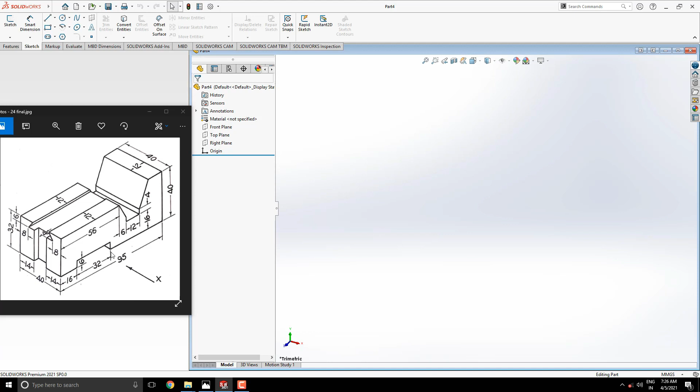First, we analyze the diagram and decide the steps. At the start, we select the right side plane, and start the profile from this corner point. Complete the profile according to dimensions. Then extrude this up to the given dimensions. Next, we make a rectangle and cut out this from solid. Also, make this sketch for cutout. Our model should be completed.

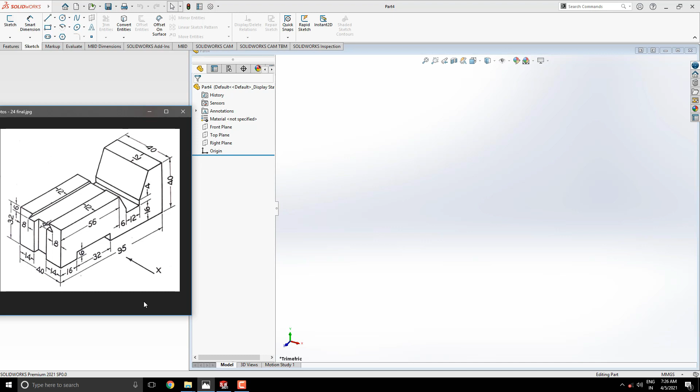Let's start modeling. Select the right plane for the sketch. Start the sketch with the line tool. Start drawing a line from the origin point to the upside, 40 millimeters. Next, draw a 12 millimeters straight line to the left side. Now we need to draw an inclined line. But make sure we do not get tracking references from any snap point, such as midpoint or endpoint. Approximately, I select a point here.

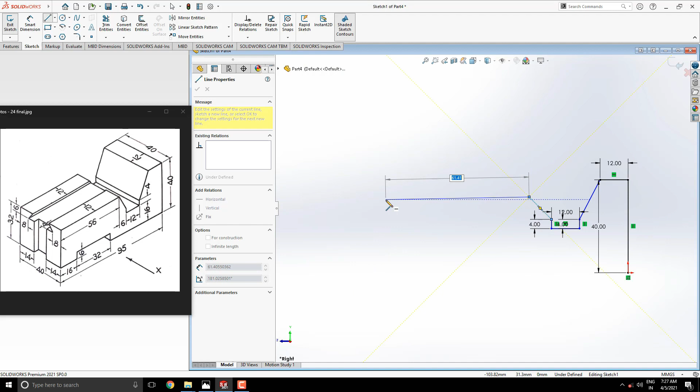Then, draw a 4 mm straight line to the downside. Draw a 12 mm straight line to the left side. Next, draw a 4 mm straight line to the upside. Once again, we draw an inclined line like this. Then, draw a 56 mm straight line to the left side. For the vertical line, get a tracking reference from the start point of the profile. Draw the vertical line like this.

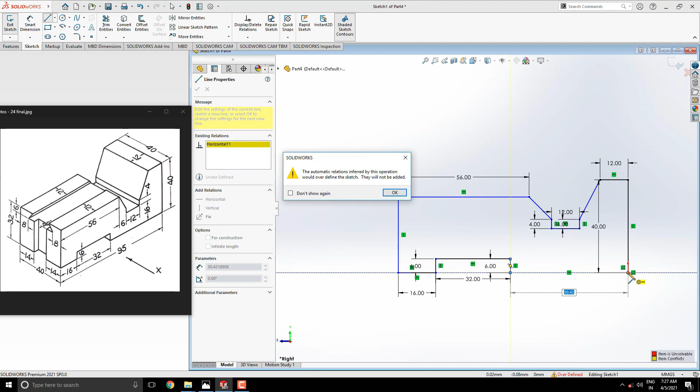Next, draw a 16 mm straight line to the right side. Next, draw a 6 mm straight line to the upside. Then, draw a 32 mm straight line to the right side. Next, draw a 6 mm straight line to the downside. Join the start point of the profile to close the sketch. Here, a notification about an over-defined sketch. Just ignore this. Escape the command.

Now, we are required to fix some dimensions, such as this vertical line. Give this dimension 32 millimeters. Next, give dimension between these two vertical lines, 95 millimeters. Now, set dimension from this vertical to this corner, 6 millimeters.

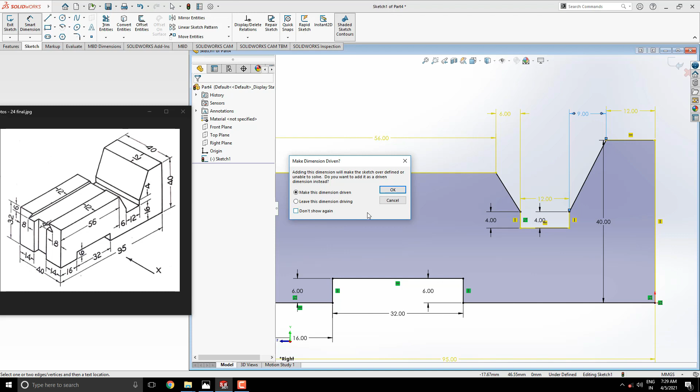Now notice here, this dimension between this vertical line to this corner point is already set. Here we got a notification that we cannot change this dimension value. Just click on OK. Our profile is completed. Make sure we draw the profile according to the dimensions as given in the diagram. Extrude this with the mid-plane option, up to 40 millimeters.

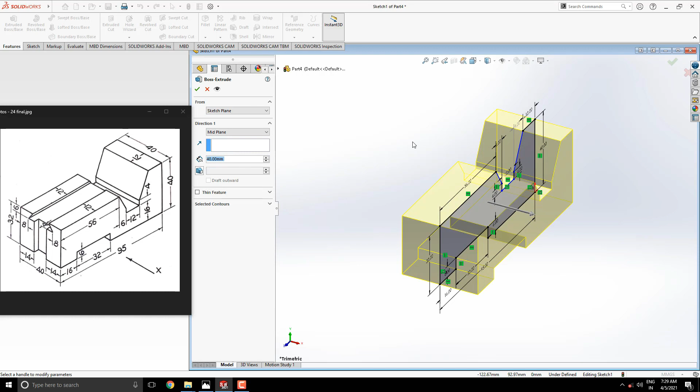Now, we make a profile for this rectangular cutout. Select this face for the sketch. Take the corner rectangle tool and start to draw from this edge in this direction. Enter the 4 mm width of the rectangle. And for the length, we select an approximate point on this edge. Ignore this warning.

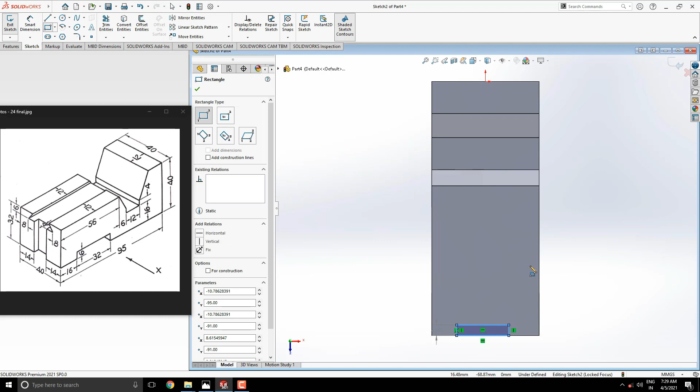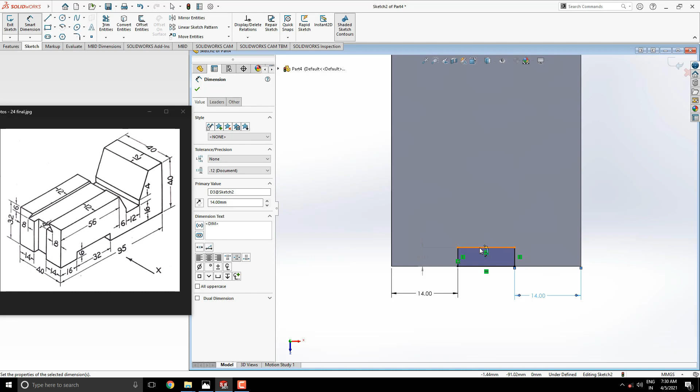Set the dimension between this edge to this vertical line of the rectangle, 14 millimeters. Similarly, this vertical line to this edge, 14 millimeters. Now, see here, the length of the rectangle is set automatically, such as 12 millimeters. We cannot change this value, because we set outer dimensions for this length. Take the extruded cut tool and select the through all option. See the preview and click on OK.

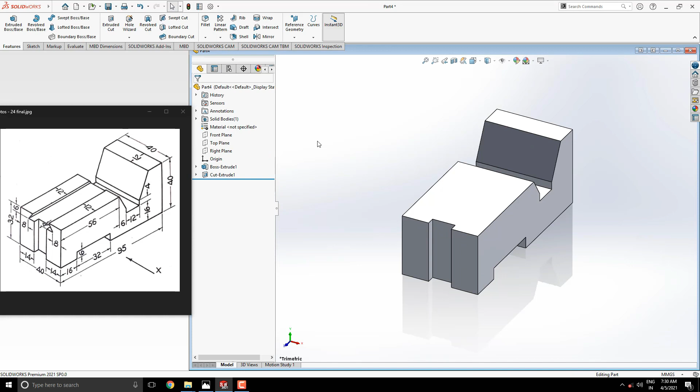Now, we make a profile for the next cutout. Select this face for the sketch. Take the line tool and approximately draw the profile as shown in the diagram. Like this. Make sure to not select any snap point.

Now, set the dimensions as given. Such as, between this corner point to this edge, 8 mm. Similarly, between this corner point to this edge, 8 mm. This corner point to this edge, 12 mm. And, this corner point to this edge, 12 mm. Our profile is set.

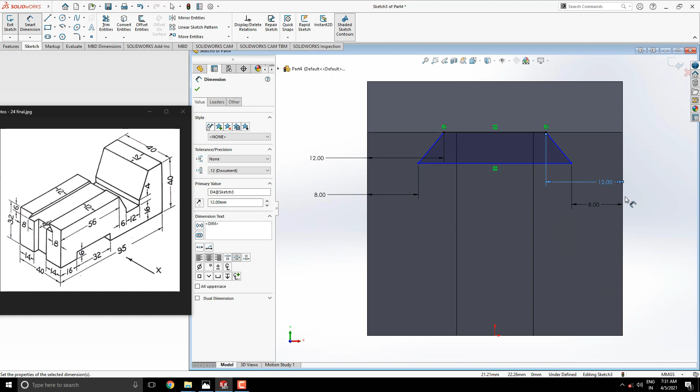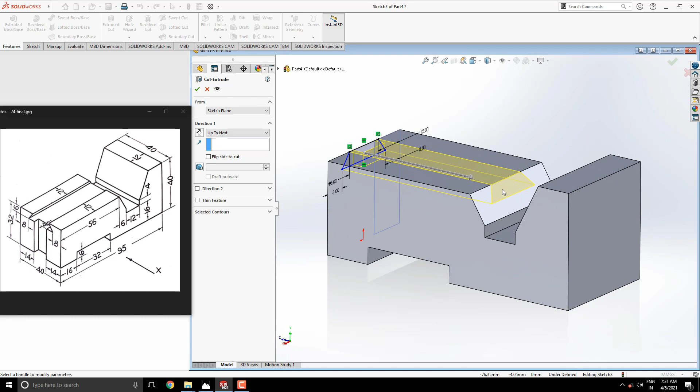Once again, take the extruded cut tool. As shown in the diagram, this profile is cut up to this slanted surface. That's why we select the up to next option for the direction. See the preview. The profile will cut out up to this slanted surface. Just click on OK. Our 3D model is completed. Apply any appearance for this model, as you like or as per your requirement.

I hope you understood all steps. Keep practicing to make this model.